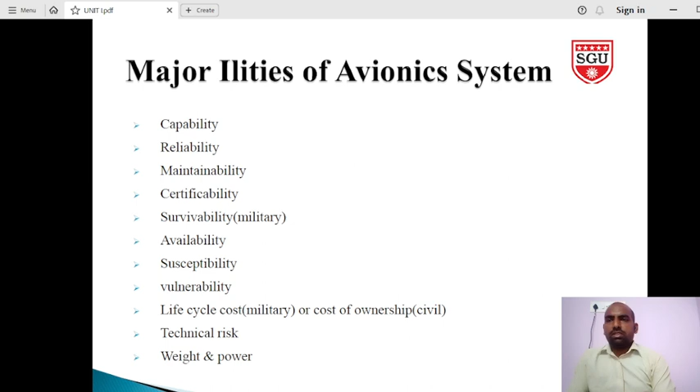Capability means how capable is an avionics system, whether it can do the job and even more. If you have some missions, is the equipment capable to do it or not? The designer tries to maximize the capability of the system within the constraints imposed, and reliability.

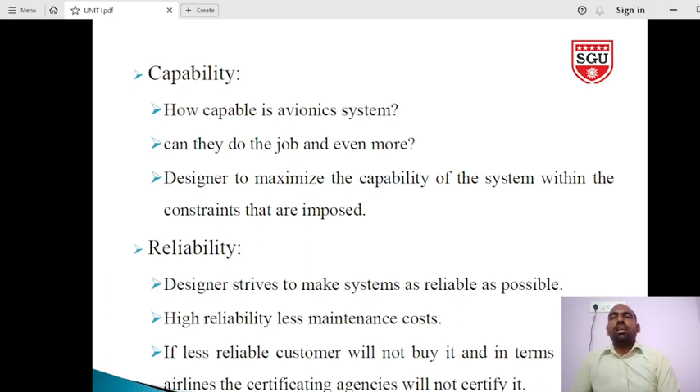Designers strive to make the system as reliable as possible, for example so that the mission is possible to complete. High reliability means less maintenance cost. If reliability is low, the customer will not buy it, and in terms of civil airlines, the certificating agencies will not certify the equipment.

Maintainability is closely related to reliability. The system needs preventive or corrective maintenance, and can be maintained through built-in testing, automated troubleshooting, and easy access to hardware.

Availability is the combination of reliability and maintainability. There is a trade-off between reliability and maintainability to optimize availability, which translates into sorties for military aircraft and into revenue flights for civil aircraft.

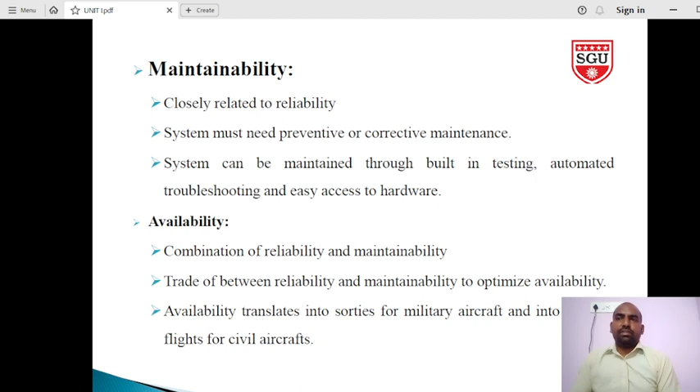Certificability is a major area of concern for avionics in civil airlines. For example, any component in the aircraft should be certified by the agencies. Certification is conducted by regulatory agencies based on detailed expert examination of all facets of aircraft design and operations. The avionics architecture should be straightforward and easily understandable, with no sneak circuits and no non-obvious modes of operation. Avionics certification focuses on three analyses: preliminary hazard, fault tree, and FMEA.

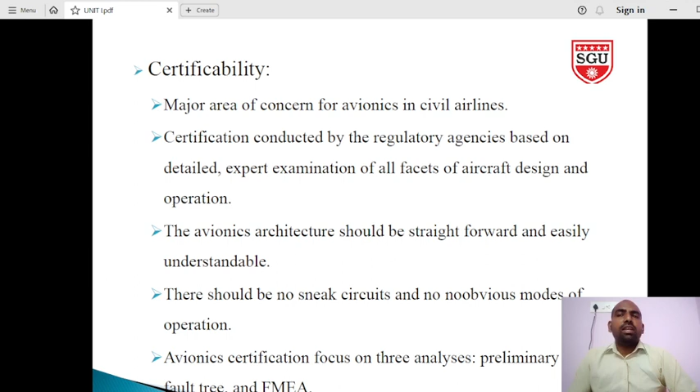Survivability is a function of susceptibility and vulnerability. Susceptibility measures the probability that an aircraft will be hit by a given threat. Vulnerability measures the probability that damage will occur if there is a hit by the threat.

Life cycle cost, or LCC, also called cost of ownership, deals with economic measures needed for evaluating avionics architecture. It includes cost of varied items such as spares, acquisition, transportation, storage, training of crew and maintenance personnel, hardware development and test, depreciation and interest.

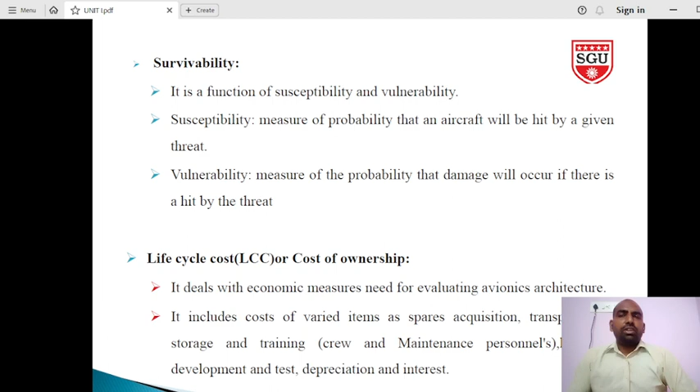Risk is the amount of failures and drawbacks in design and implementation. For example, any electronic system may get a failure, but how much risk is acceptable in case of failure? This is overcome by using the latest technology and fail-proof techniques, to overcome both development and long-term technological risk.

Weight and power: minimizing the weight and power requirements are two fundamental concepts of avionic design. Whenever designing a component, weight and power consumption should be reduced, because our aim for the aircraft is to reduce weight. So the design must be lightweight and low power consuming, which is possible through the data bus and the latest advancements in electronic devices.

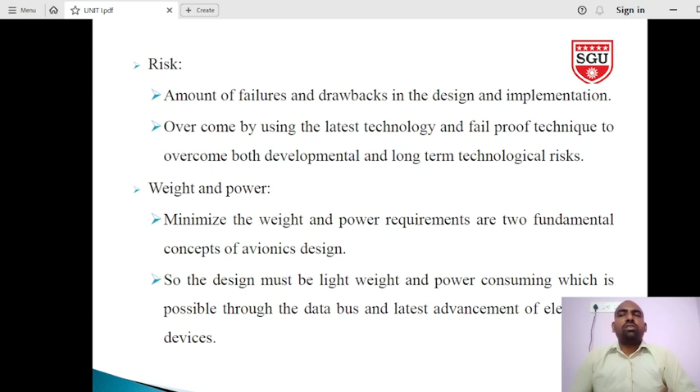Integrated avionics weapon systems in an aircraft include sonar, radar, military communication, electro-optics, ECM or ECCM, ESM, DAS, and tactical missile guidance.

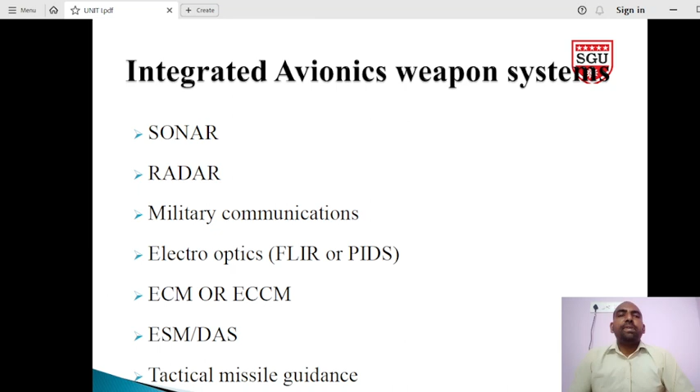Now, the glass cockpit. What is meant by glass cockpit? The term generally refers to an LCD display that replaces the conventional six-pack of flight instruments. Previously aircraft had the six-pack conventional analog systems, and these analog displays are replaced by LCD displays, which is called the glass cockpit.

It is a term given to any aircraft in which the primary instruments are located within a single primary flight display, PFD, and multifunction displays, MFD, that look like a computer screen, a large flat glass panel display. It has some advantages as well as disadvantages.

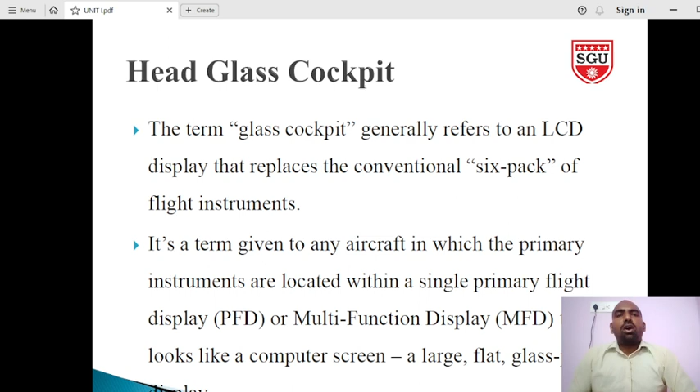For analog type, we don't need power consumption, but for digital displays we need power consumption. PFDs and MFDs have the capability to display all traditional instruments along with lots of additional data such as engine data, checklist, weather and traffic displays.

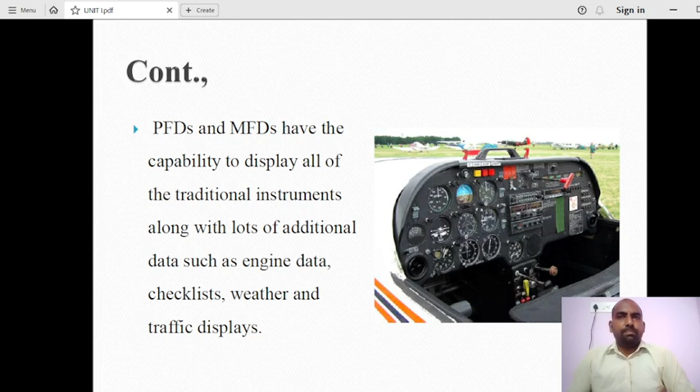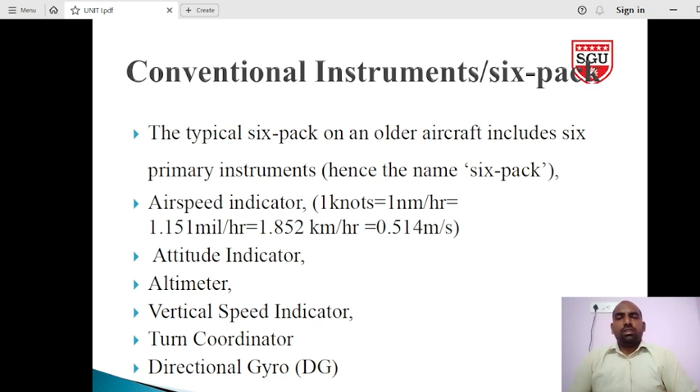This diagram indicates the six-pack conventional instruments, also called six-pack conventional instruments. The typical six-pack on an older aircraft includes six primary instruments, hence the name: airspeed indicator, attitude indicator, altimeter, vertical speed indicator, turn coordinator, and directional gyro (DG).

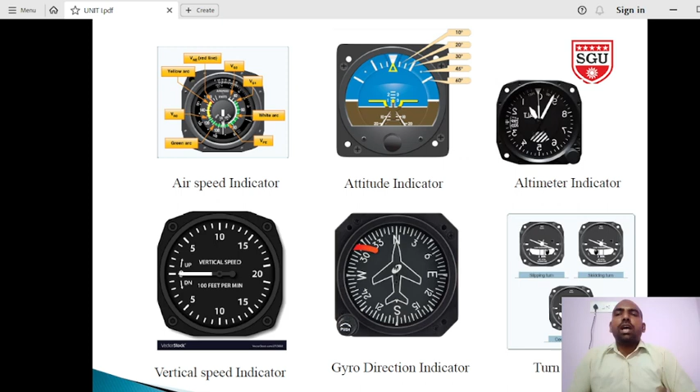So these are the six-pack conventional instruments: first the airspeed indicator, second the attitude indicator, third the altimeter indicator, fourth the vertical speed indicator, fifth the gyro direction indicator, and sixth the turn indicator.

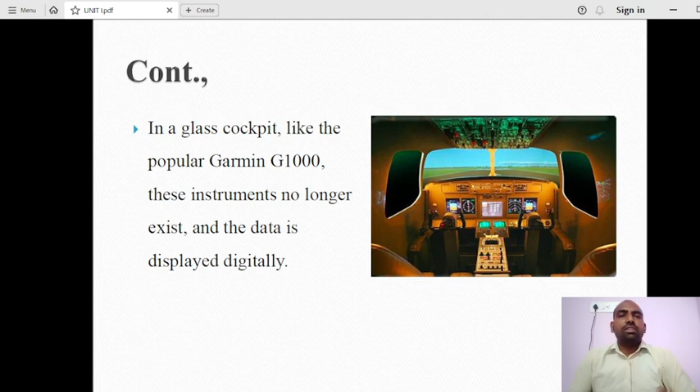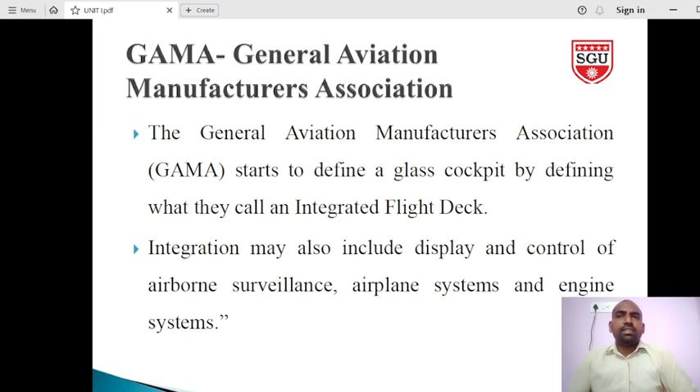The General Aviation Manufacturer Association, GAMA, started to define a glass cockpit by defining what they call an integrated flight deck. Integration may also include display and control of airborne surveillance, airplane systems, and engine systems.

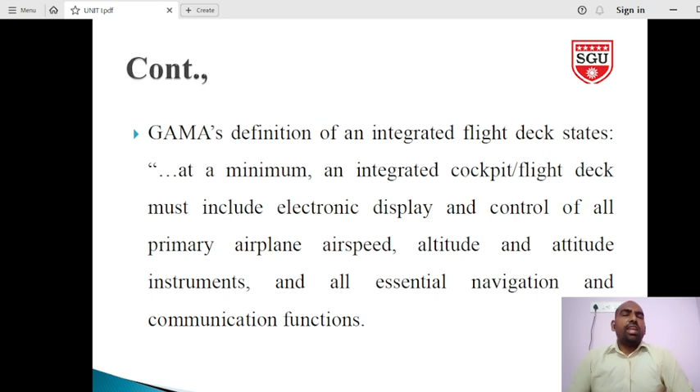GAMA's definition of an integrated flight deck states that at a minimum, an integrated cockpit flight deck must include electronic displays and control of primary airplane airspeed, altitude and attitude instruments, and all essential navigation and communication functions.

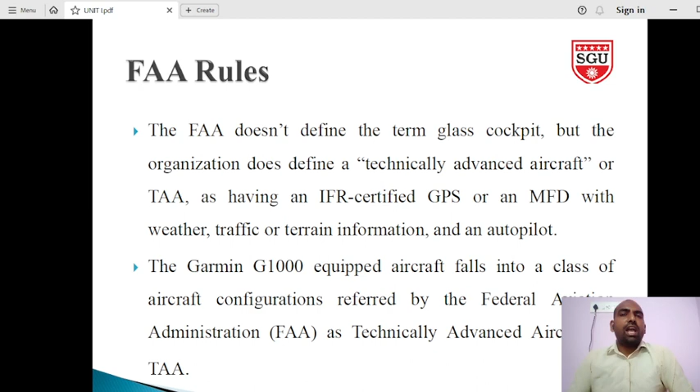FAA rules: the FAA does not define the term glass cockpit, but does define a technically advanced aircraft, or TAA, as one having an IFR certified GPS or an MFD with weather, traffic or terrain information, and an autopilot. The Garmin G1000 equipped aircraft falls into this class of aircraft configuration referred by the Federal Aviation Administration as a technically advanced aircraft, or TAA.

It has advantages as well as drawbacks. Today's aircraft have multiple interdependent electronic displays that work together to give the pilot all the necessary data on one screen. These glass cockpits are meant to be more efficient for pilots but can cause problems if the pilot is unfamiliar with the onboard system, so the pilot must first undergo training on all the advanced equipment.

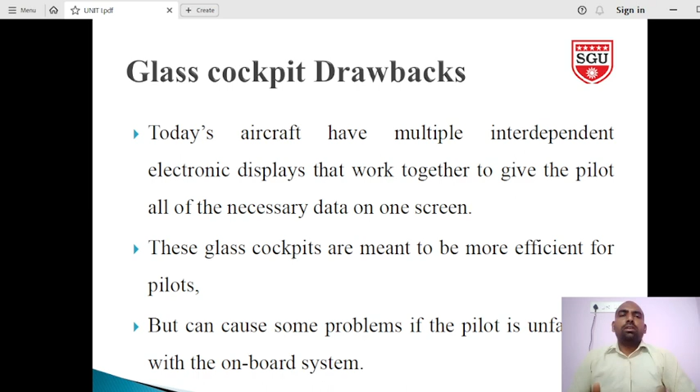Problems can arise for pilots who fail to become completely familiar with the glass cockpit technology and spend too much heads-down time figuring out computer functions instead of flying. This heads-down time can even be a problem for pilots experienced with the technology, as they can easily become overly dependent on it or fixate on its function instead of looking out the window.